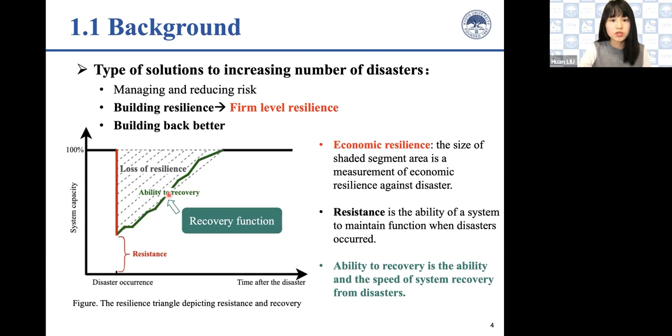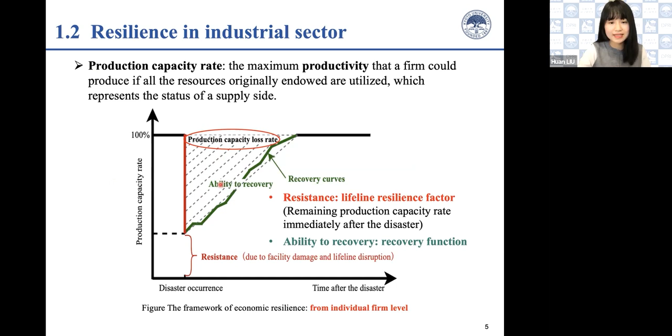Many studies have been done from the macroeconomic perspective, but very little evidence has been provided from the individual firm level. So in our research, we focus on the resilience analysis from industry sectors' perspective. Here, production capacity rate is the maximum productivity that a firm could produce if all the resources are utilized in the post-disaster. From the perspective of industry sectors, the triangle area here actually represents the production capacity loss rate in industry sectors caused by disasters. So as we introduced, the resilience can be defined from 2 dimensions.

First is the resistance. Resistance can be impacted by the hazard intensity and also by the lifeline disruptions. In our previous research, we developed and proposed the lifeline resilience factors, which can estimate the remaining percentage of production capacity for firms when lifeline disruptions occurred. Compared with previous studies, which are derived from hypothetical disaster business survey data or expert opinion-based estimations, in our research we propose a modeling framework which can estimate the lifeline resilience factors from empirical post-disaster data. And also, we derive a set of lifeline resilience factors by applying it to the 2011 Great East Japan earthquake dataset.

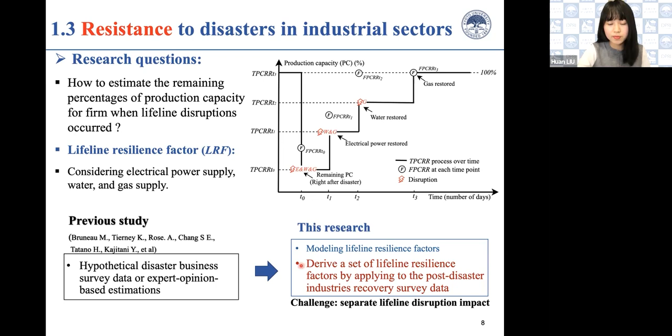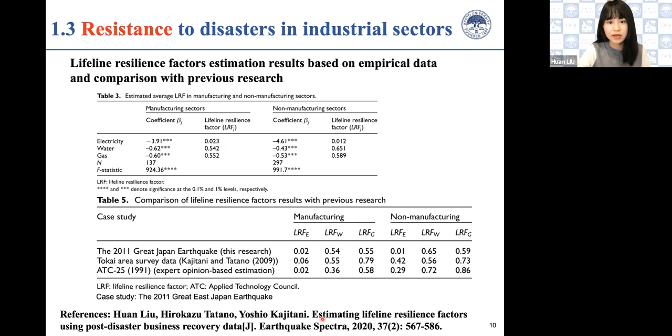Here are the resistance, the lifeline resilience factors we derived from the 2011 Great East Japan earthquake. For example, if the electricity is disrupted, then only 2.3% of production capacity remained in industry sectors. So the lifeline resilience factors describe the importance of lifelines in supporting productivity. We also compare the estimation results with the current references from the hypothetical disaster survey and expert opinion-based estimation, ATC 25, and results show consistency. If you have some interest in the resistance analysis, please kindly refer to this paper we published in Earthquake Spectra in 2020. Today's presentation, I would like to focus on the recovery analysis in industry sectors.

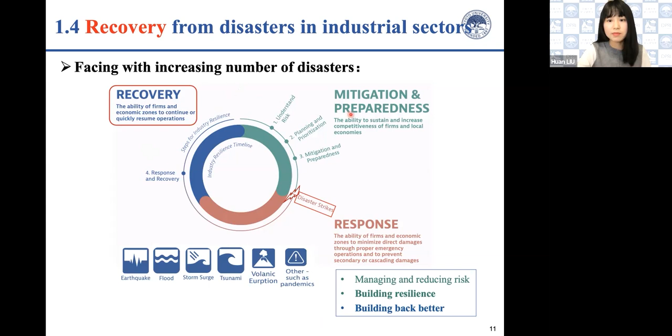Knowing the recovery of industry sectors can help us to estimate the losses caused by disasters, and understanding recovery can help us with better preparation and mitigation in case of future disasters. Current studies struggled to identify the recovery from the macro perspective. However, the dynamic resilience from the firm level perspective has not been well addressed. Meanwhile, so far, the current methodologies, for example survival analysis or regression analysis, did not include the impact of influencing factors and also the uncertainty in the recovery process.

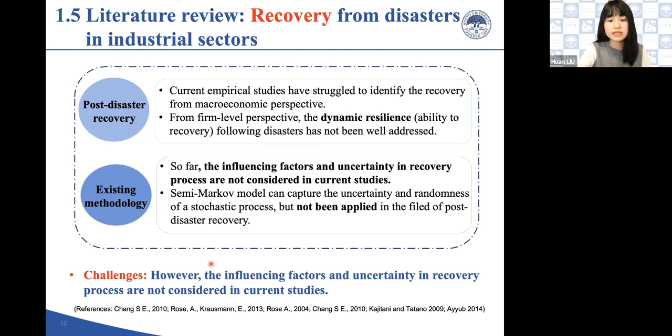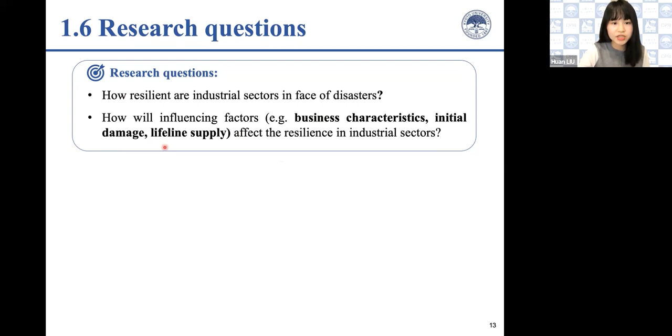Semi-Markov models can capture the uncertainty and the randomness of a stochastic process, but have not been applied in the field of post-disaster recovery. Facing this situation, the challenge in modeling the recovery is how we could incorporate the influencing factors and adjust for the uncertainty in the recovery function. Under this background, in our research, we aim to answer these two questions. First, how resilient are industry sectors in facing disasters, and how will influencing factors affect the resilience in industry sectors? So we will consider different industry sector types, business size and initial damages, and also the lifeline supply, and how those factors will impact the recovery.

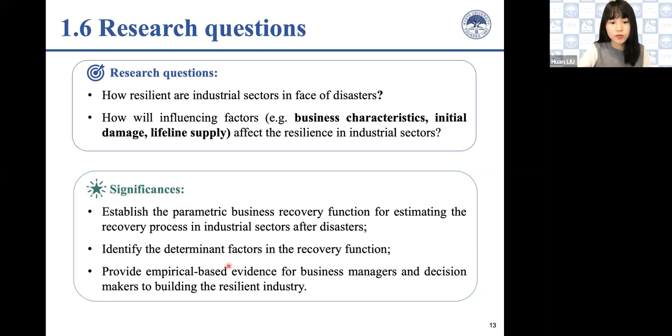By doing this, we could establish the parametric business recovery function to estimate the recovery process in industry sectors, and we can identify the importance of factors in the recovery function. And with those kinds of results, we could provide empirical evidence for business managers and decision makers to build a resilient industry. To achieve this, this is the framework of our research.

Immediately after disaster, we have different types of firms with different initial damage. And then by deriving the recovery function, we can estimate the recovery curves. So this triangle area represents the losses caused by disasters. And also we incorporate different factors into the recovery function to compare how those factors impact the recovery. To achieve these objectives, we have 4 steps.

First, we will introduce the multi-state semi-Markov process and how we want to utilize the Markov process to describe the business recovery process. And then we establish a conditional recovery function, which is conditional on different initial damage. And we solve the parameters by establishing and maximizing the likelihood function. Then we identify how factors impact the recovery function.

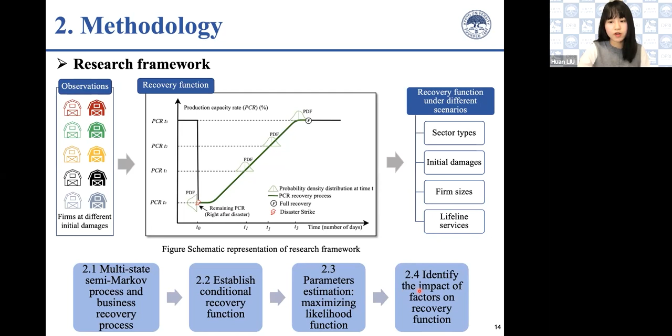For example, in the aftermath of disaster, a firm could start from 25%, and after some time in 25%, it could move to a higher state until full recovery. And also, the initial percentage could be 50%, and after some time in 50%, maybe the lifeline is restored, so the production capacity will transit to a higher state until full recovery.

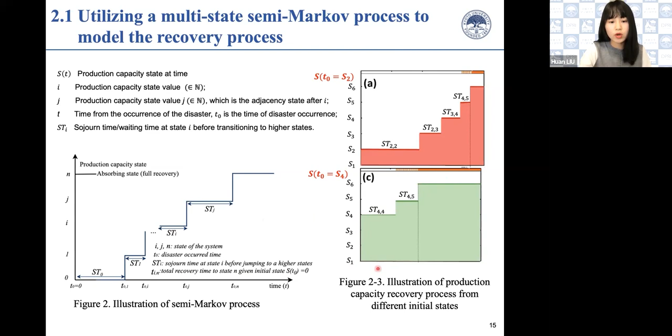So the property of a semi-Markov process actually matches the process of post-disaster recovery in industry sectors. This is why we want to introduce the semi-Markov process to describe the recovery process. As we mentioned, there are 2 elements in the semi-Markov process: the distribution function, which we represent as f(ST_i), and also the transition matrix. So the probability of transition between states can be represented as a matrix.

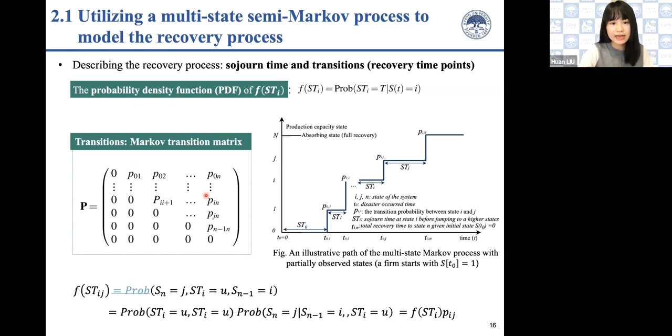And on the other hand, we developed the recovery function, which describes the probability of a firm's production capacity exceeding a certain percentage within time T, conditional on the initial damage, because the initial damage will significantly impact the recovery. So we establish the recovery function conditional on different initial damage.

And also, as shown in the figure here, we can see that the total recovery time T can actually be expressed as a sum of the sojourn times. So by substituting the relationship between the total recovery time and the sojourn time, we can have the recovery function, which is a function of the sojourn time distribution.

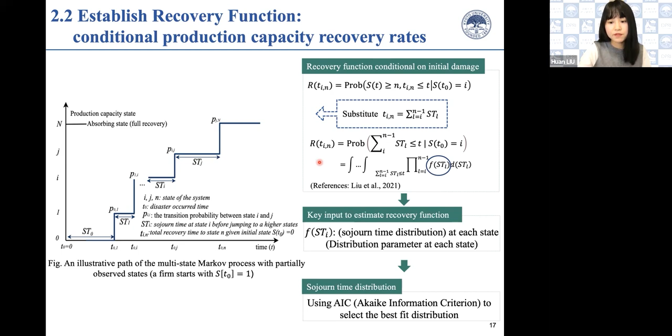And to select the best fit distribution, we apply the AIC standard to select the best fit distribution for the raw data. And to estimate the parameters in the recovery function, we establish the likelihood function and maximize the likelihood function to calculate the parameters.

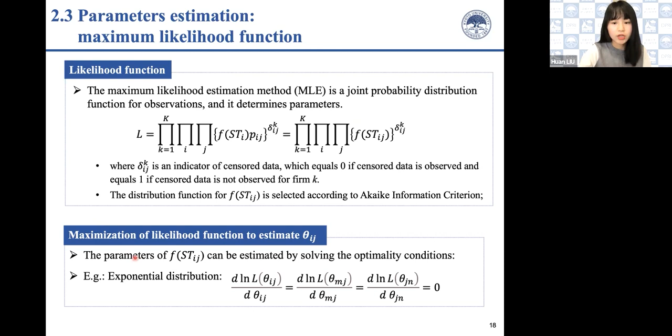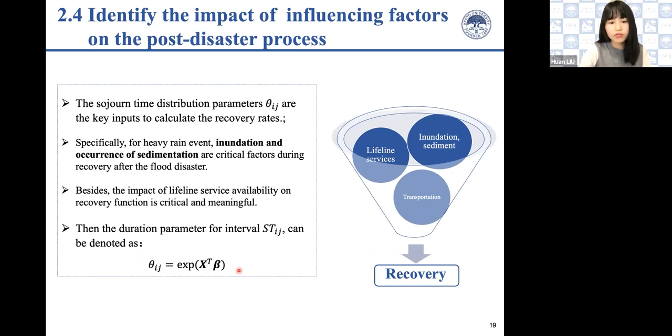Also, we can introduce the influencing factors and express the parameters in the recovery function as a function of different influencing factors to compare how those factors impact the recovery function. So this is the framework of our modeling of the recovery function under the semi-Markov process.

So here I want to briefly introduce two case studies we have applied so far. The first one is the Kumamoto earthquake, and the second one is the 2018 heavy rain event. So this is the Kumamoto earthquake, which occurred on April 16, 2016, with a maximum magnitude 7 main shock, and caused huge losses in Kumamoto prefecture.

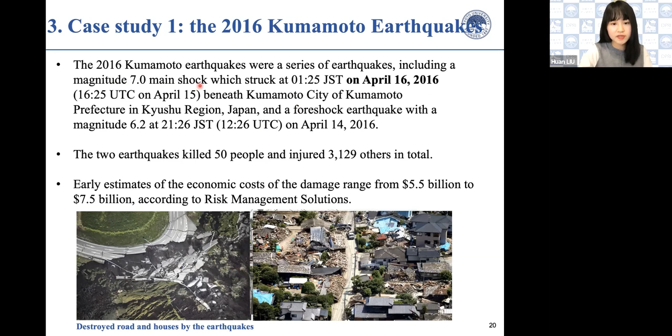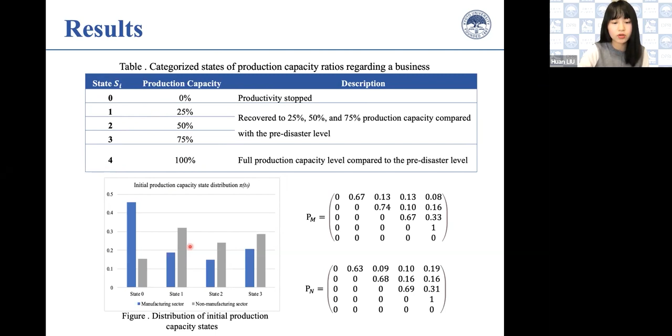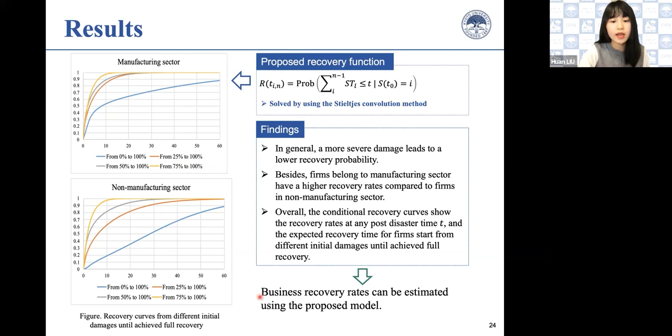So here's the final result we calculated with the proposed recovery function, and from the result in the manufacturing sector and non-manufacturing sector, we can see that in general, more severe damage can lead to a lower recovery probability. And also in this case study, firms in the manufacturing sector have a higher recovery rate compared to firms in the non-manufacturing sector. So overall, the proposed recovery function can estimate the recovery rate in the post-disaster recovery time T.

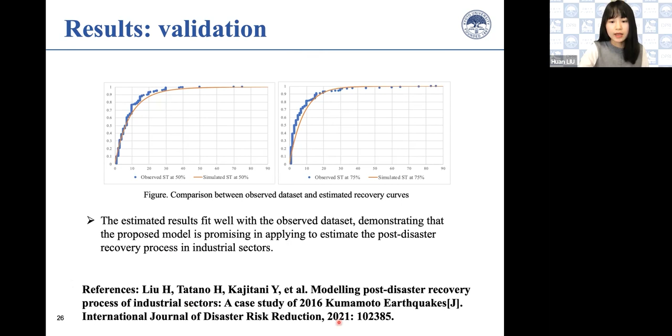And also we validate the result by comparing the observed data set with the estimated result. So the result fits well, which shows that the proposed model is promising in estimating the post-disaster recovery process in industry sectors. So if you have some interest in this paper, please kindly refer to the paper we published in 2021. And then the second case I want to briefly introduce is the heavy rain event of July 2018.

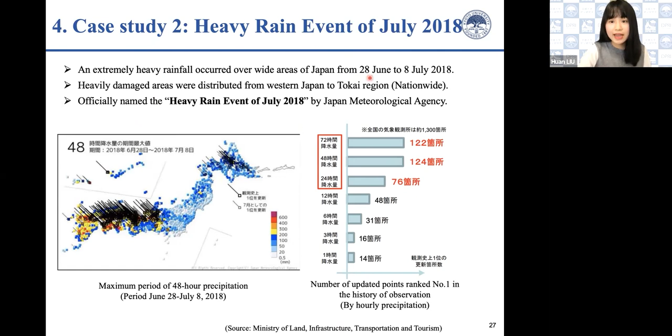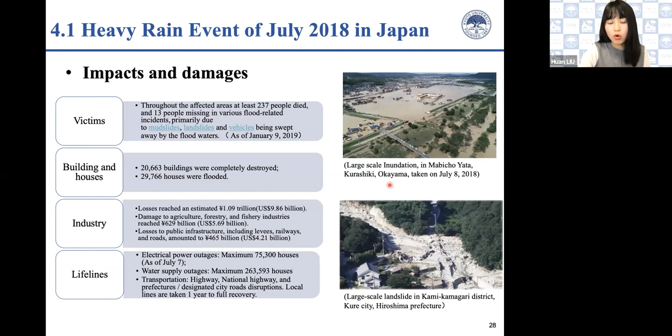It occurred from June 28 to July 8 and caused huge damage to human beings, buildings, industry, and lifelines. Those are the inundated area in Okayama, and the landslides that occurred after the heavy rain in Hiroshima Prefecture. Regarding the losses in industry sectors, around 23 to 30% losses were caused in Hiroshima, Okayama, and Ehime prefectures. And as we can see, the power plants were inundated, and there were also many transportation disruptions in the disaster-affected area.

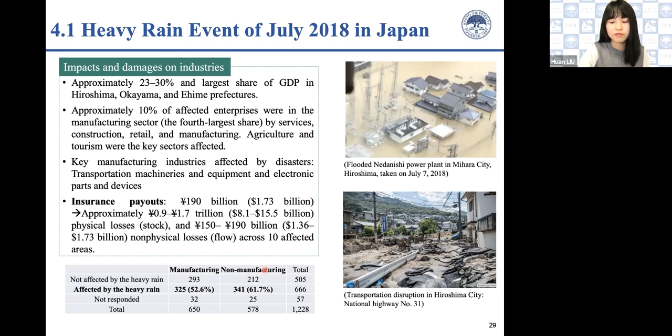And we conducted a survey with a total of 1,228 respondents, and more than 52% of firms were affected by the heavy rain in the manufacturing sector, and 61.7% of firms suffered damage in non-manufacturing sectors. So we know that there are different characteristics for different types of disaster. In the earthquake type, we consider electricity, water, and gas, and how those lifeline supplies impact the recovery.

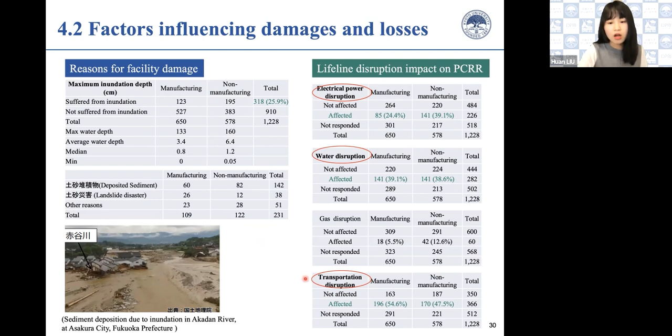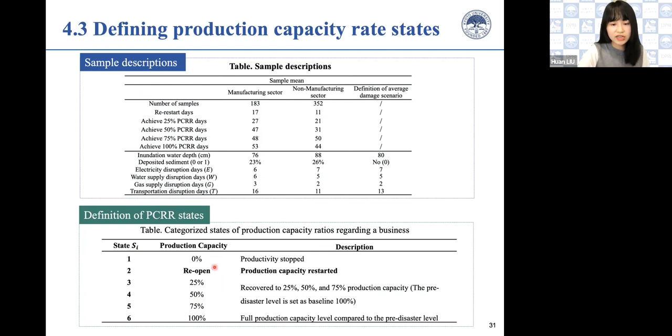However, for the flood disaster, we also want to include the inundation depths and the sediment deposit, and how those factors impact the recovery process, because we found severe damage caused by the inundation and also the sediment. And we would also like to compare how transportation disruption impacts the recovery. We also divide the production capacity rate into different states, from totally stopped until full recovery. And this is a conditional recovery function, and we estimate the recovery curves conditional on different initial damage until full recovery is achieved.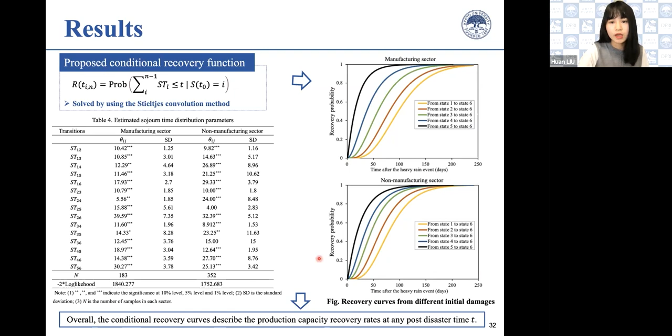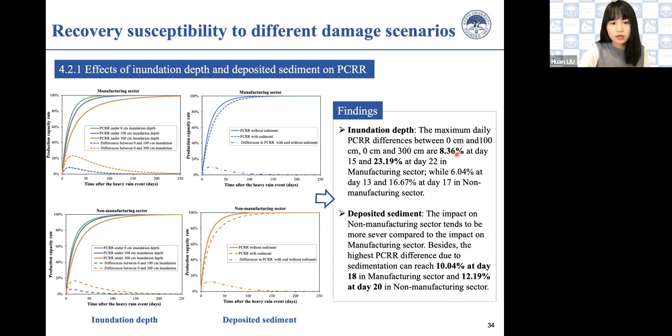So overall, the conditional recovery curves describe the probability of production capacity recovery rate at any post-disaster time T. In addition, here we compare how inundation depths affect the production capacity rate. So we compare 0 centimeter, 100 centimeter, and 300 centimeter inundation depths to show how those change, and also with and without sediment, the impact on the production capacity rate. So we can compare how many percentage differences can occur under different disaster scenarios.

We also compare how different lifeline disruption scenarios, like no disruption, 1 week longer disruption, or 16 days disruption, and with and without transportation disruption, impact the production capacity loss rate, which is the triangle area shown in the figure in the previous introduction. So we can see that in this flood disaster case, the inundation severely damaged the production capacity rate, and the lifeline restoration process also severely impacts the production capacity loss. This can provide an overview of how many percentage differences of production capacity loss rate occur under different damage scenarios.

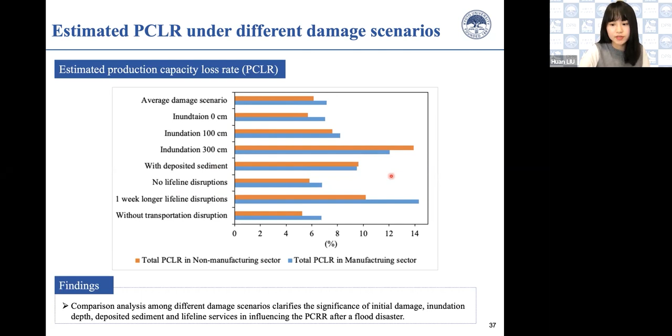So to conclude the presentation, in this research, we established a conditional recovery function under the semi-Markov framework, which can consider the impact of influencing factors and also compare how production capacity loss differs under different disaster scenarios, and the effectiveness and application are identified through 2 case studies. In the future, the result may help to understand disaster risk from the individual firm and industry sector's perspective, and contribute to estimating production capacity loss due to flood disasters.

And also, investing in building more resilient critical infrastructures could significantly reduce losses caused by disasters. So in the future, we also want to statistically compare how resilience options can impact the recovery process, and the proposed recovery function under the semi-Markov framework will be compared with other types of recovery models to identify the effectiveness of this model.